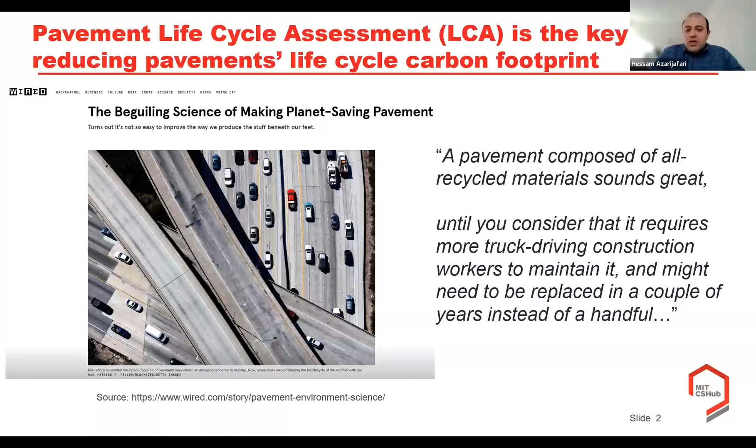But there is more awareness these days that we have to think about the future and the consequences of our decisions when considering solutions to mitigate GHG emissions. For example, it was stated that it might require more truck driving and construction workers to maintain it, implying the importance of considering the frequency of maintenance for those roads in the future, and also repair or replacements over the life cycle of a product.

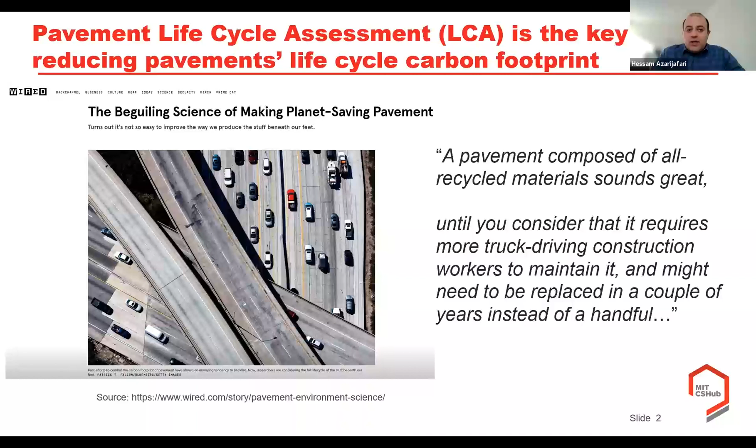We see the same approach when we look at legislation, for example the Inflation Reduction Act, where there are a lot of incentives around reducing the embodied impacts of construction materials, including different types of pavement materials. These are very well targeted to reduce materials impact.

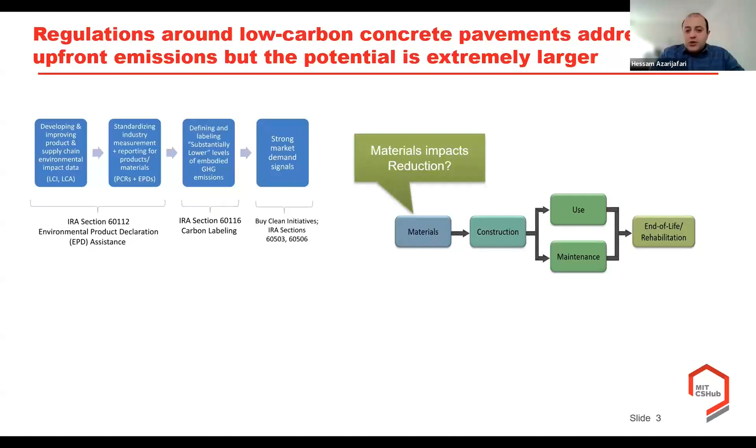But from a life cycle perspective, we see a lot of different opportunities in the construction, use, maintenance, and end-of-life phases of the pavement life cycle.

For example, how much we can reduce excess fuel consumption induced by the surface roughness and deflection of pavements. How can we improve the surface reflectance of pavements to gain benefits in terms of the albedo effect? Or for concrete pavements, how can we improve the carbon uptake or carbonation in order to sequester a larger amount of CO2 from the atmosphere?

From a maintenance perspective, it's a very important decision because it can determine the surface characteristics of our pavements. Think about how we can wisely spend our dollar values on pavements to get the most out of pavement performance and make the surface smoother or improve pavement condition. That's a very good question for improving maintenance activities and including this in our legislation.

Or ultimately, at the end of life, how can we improve the material circularity? How can we gain more benefits from recycling pavement materials into other products or other systems as well?

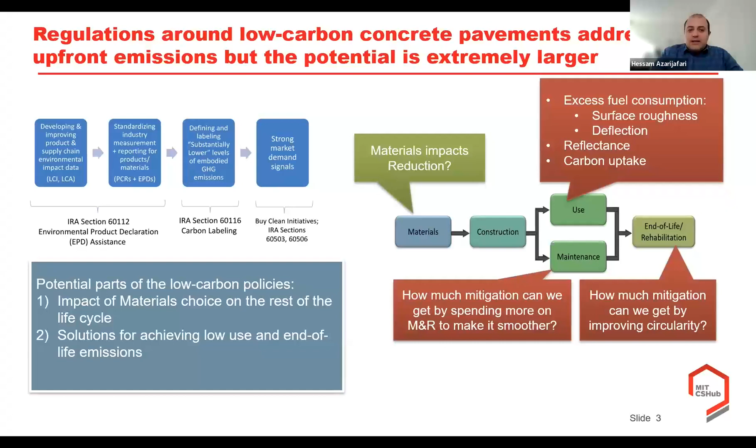So thinking about different solutions from a prospective standpoint, second, not only can we reduce the embodied impacts, but also think about current solutions available to mitigate use and end-of-life emissions. These are two important policies that we can add to embodied impact calculations, for example for buildings and embodied impact reduction. And why is it important?

These pie charts explain the importance of considering the life cycle perspective when we make a decision, showing the proportion of life cycle GHG emissions from different phases. As you can see, for both asphalt and concrete pavements, more than half or three quarters of the emissions come from the use phase emissions relevant to the surface roughness and deflection of pavements. And there is around a quarter from the material and construction, which we refer to as embodied impact.

So it's important to think about this more holistically and from a life cycle perspective. But what do we need to do?

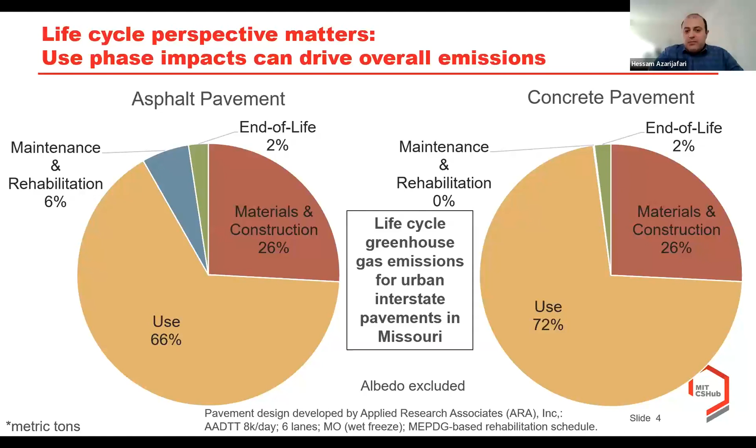Here, we would need some tools to quantify the environmental impacts of pavements. There are many tools available from different authorities, universities, and research centers that include and incorporate different life cycle phases and quantify the life cycle environmental impacts of pavements. We generally observe two shortcomings in these tools.

The first one, which was very prevalent, was that in many tools the use phase impact was completely or partially excluded, meaning that the pavement-vehicle interactions, the deflection and surface roughness induced fuel consumptions, were excluded.

The albedo effect or the carbonation weren't included as well. And in those tools that we have the use phase, we saw that they are relatively data intensive, meaning that they ask users a lot of data to quantify the life cycle environmental impacts, which makes the LCA cost prohibitive, both from the labor and data collection perspective.

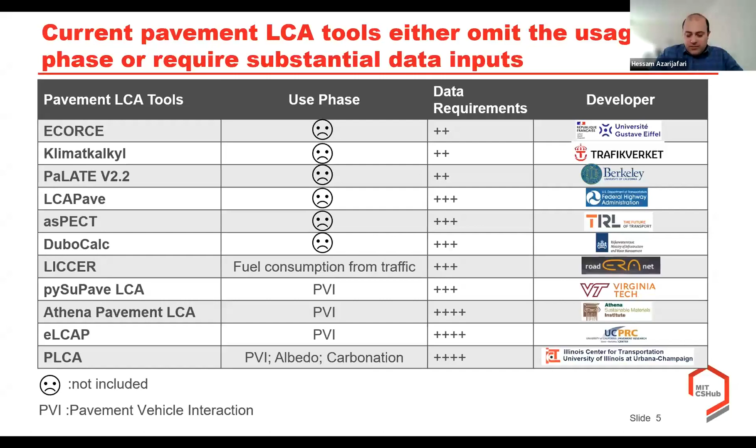So to put it in a nutshell, we observed that there are three main gaps in pavement LCA that we covered in our Streamlined LCA tool development. The first one is to deal with the cost and labor intensity of the pavement LCA. The second is about the extent of data that we need to input. And the last one is the uncertainty relevant to the future.

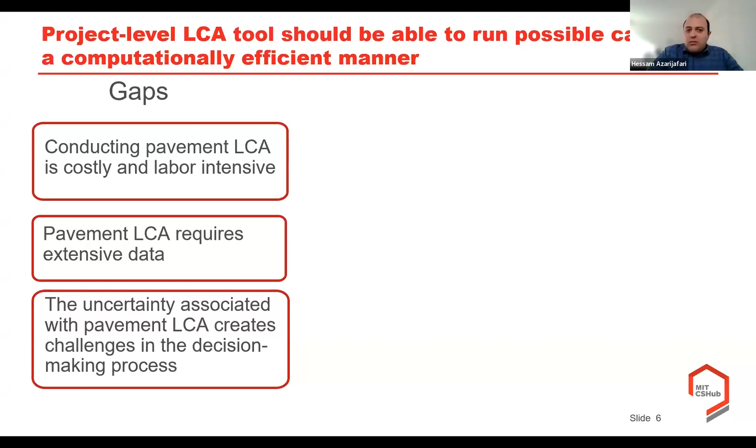Generally, whatever decisions that we make for the future deal with some level of uncertainty, and making decisions under uncertain conditions, capturing the uncertainty and embracing that would really help us to make a robust decision on the preferred scenario or preferred selections between different alternatives.

Here at the MIT Concrete Sustainability Hub, we developed a streamlined pavement LCA framework based on publicly available data. These are some federal and DOT available data that we collected and included in our tool and analysis. We included a probabilistic comparative analysis to capture the uncertainty and give the decision maker a better confidence about the robustness of the results.

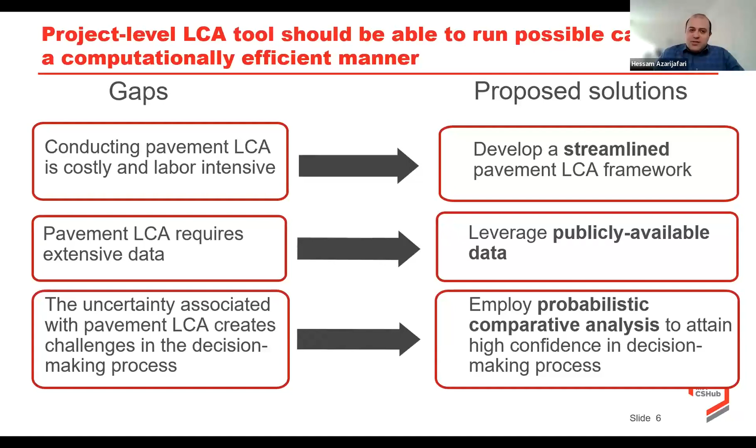Thank you, Dr. Azarijafari. So thanks for the brief introduction of the research gaps of the Streamlined pavement LCA development. I'm going to start with the methodology we have been implementing for the development of the CSHub Streamlined pavement LCA framework, and following that, the tool development based on this framework.

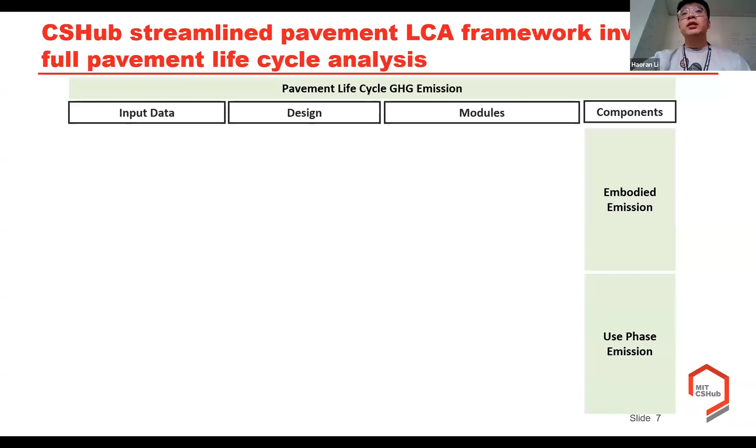So the CSHub pavement LCA framework involves all the components of pavement LCA. We have the embodied emission as well as the use phase emission consideration. To simulate the life cycle GHG emissions based on that, we need quantitative evaluation and computation of the material and construction emissions, which includes the raw material supply, transportation, energy, and fuel consumption.

And for the use phase emission, we have embedded three sub-modules: the pavement vehicle interaction, which is PVI, related to the deflection of the pavement, as well as the pavement surface roughness. In addition, we have embedded the model of the albedo, which is the reflectivity of the surface of pavement, as well as the concrete carbonation, which is also called CO2 sequestration.

And for the data requirement to do this modeling and computation, from the design perspective, we need a paving material mixture design for both concrete material and asphalt material, which are mostly used for our pavement construction, and here we have the pavement design alternatives: the JPCP and HMA design.

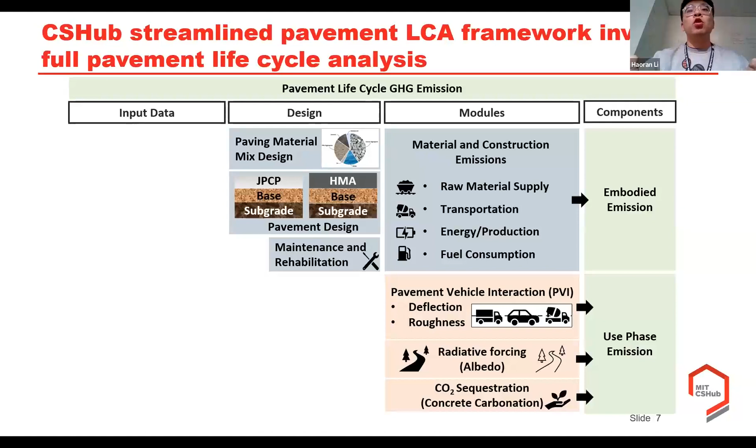In addition, the maintenance and rehabilitation, which is called M&R, is a significant component that will affect both the embodied emission because of the construction and material consumption, as well as significantly affect the sub-modules when we are doing the use phase computation of the life cycle GHG emission.

So there's extensive data required to maintain this computation and pavement design. We include different pavement context perspectives, which include geographical location and climate conditions of pavement, including temperature, rain, moisture, etc., as well as material properties for all the materials involved in our pavement LCA analysis. In addition, the pavement geometry, which is highly correlated to our pavement design perspective, and last but not least, the traffic loadings as a significant component affecting our use phase and also the embodied emission because of pavement design.

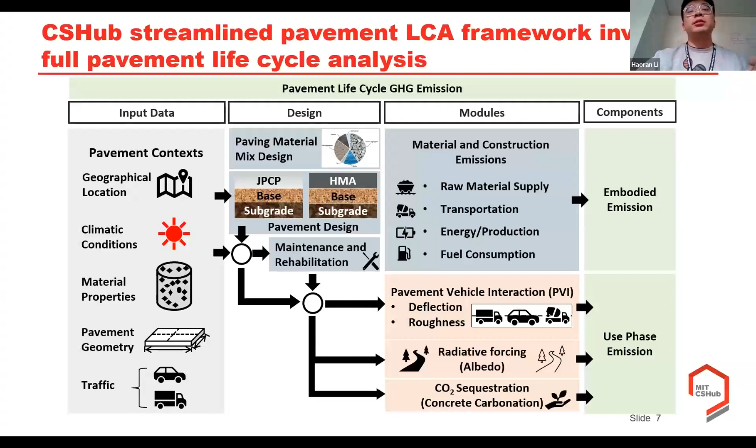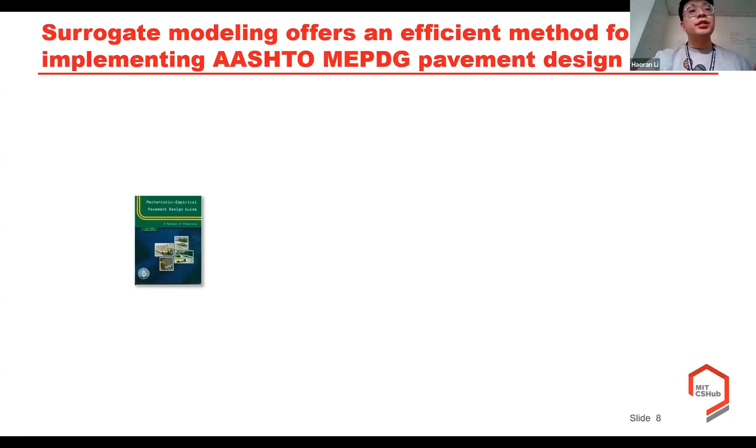And so we start with the pavement design streamline. Here we have the most advanced pavement design guide, very used in the US and Canada, which is called Mechanistic Empirical Pavement Design Guide, simplified as MEPDG. This design guide has many benefits, but also some disadvantages for the user to directly implement, because first it needs the Pavement ME software as a companion software, and the Pavement ME software requires extensive data from the user as well.

There's more than 2,000 inputs from the user to actually perform a segment level pavement design, which is complicated. In addition, the Pavement ME software is more like a pavement analysis software. It analyzes the pavement performance over a long time perspective, but it cannot give a direct design optimization for this pavement. Also, to run Pavement ME, there's a license fee which may not be affordable by local users. In addition, this is time-consuming software which needs several iterative designs to find the optimized design by the user itself.

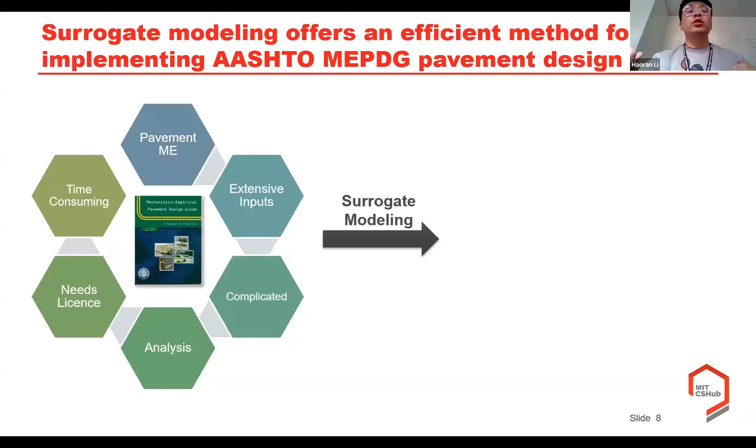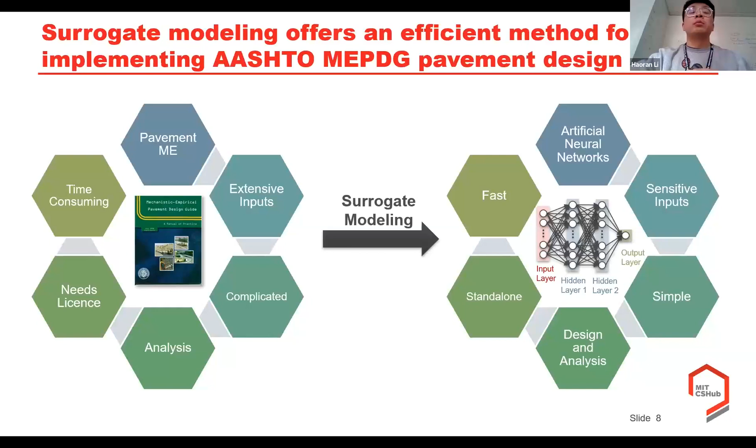So to solve this, we propose a surrogate modeling method to accelerate this pavement design using MEPDG. We propose to use a machine learning model as a surrogate model of Pavement ME simulations, using artificial neural networks to perform this surrogate modeling. We perform sensitivity analysis to extract the most sensitive design parameters for our neural network model training, which is simple and can involve both long-term pavement performance prediction as well as design optimization. This is a standalone model which can be run without further Pavement ME implementation, and this neural network surrogate model is much faster than the Pavement ME software.

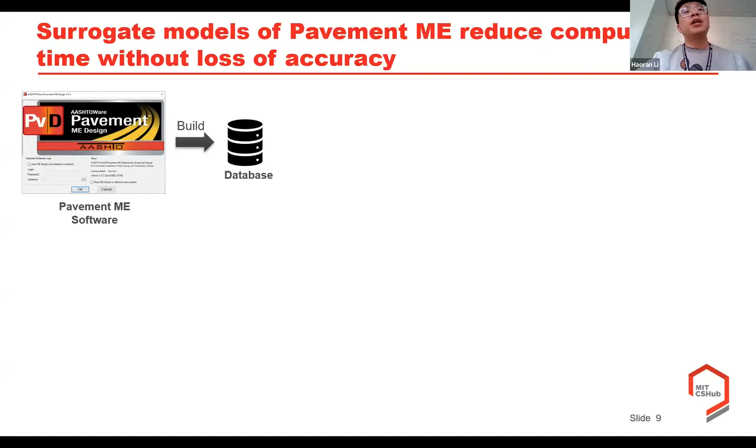So to do so, we start from the Pavement ME software simulation. We have run thousands of Pavement ME simulations to build our database for the training of our neural network models. After that, we embedded these neural network models in our Streamlined Pavement LCA tool as a standalone software tool, where we will be able to input our data directly into our Pavement Streamlined LCA tool.

Then we will be able to predict the different pavement performance for both concrete pavement as well as asphalt pavement, which include transverse cracking and joint faulting for the concrete pavement. For the asphalt pavement, we have fatigue cracking, rutting, and thermal cracking, which align with Pavement ME direct output. In this case, the pavement surface roughness can be computed based on the MEPDG guidelines as a synthetic indicator of pavement surface roughness, and they will significantly affect our design decisions.

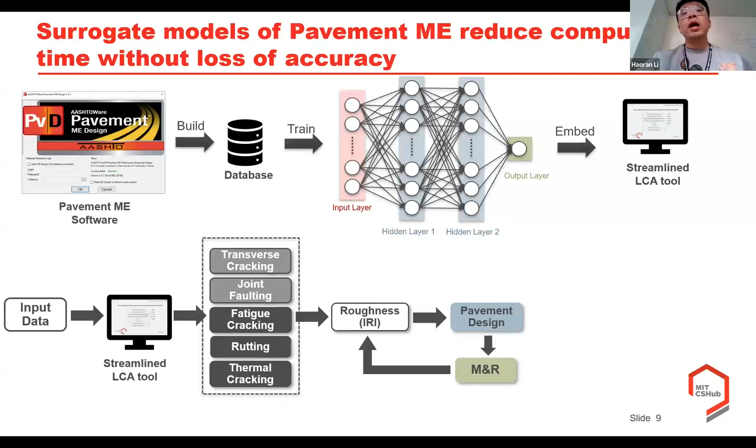In addition, the M&R will also be involved in our Streamlined Pavement LCA tool, which will happen during the pavement's service life, which will also affect the pavement roughness.

At last, we can compare our Pavement LCA IRI prediction with the Pavement ME prediction when we are using neural networks for the prediction of long-term pavement roughness. We can see here the neural networks have a perfect agreement with the Pavement ME prediction for long-term 50-year pavement service life, but the neural network model only needs a fraction of the computation time compared to Pavement ME.

To run a segment performance prediction, the neural network model only needs 0.02 seconds, which is much shorter than the 10 minutes Pavement ME simulation takes.

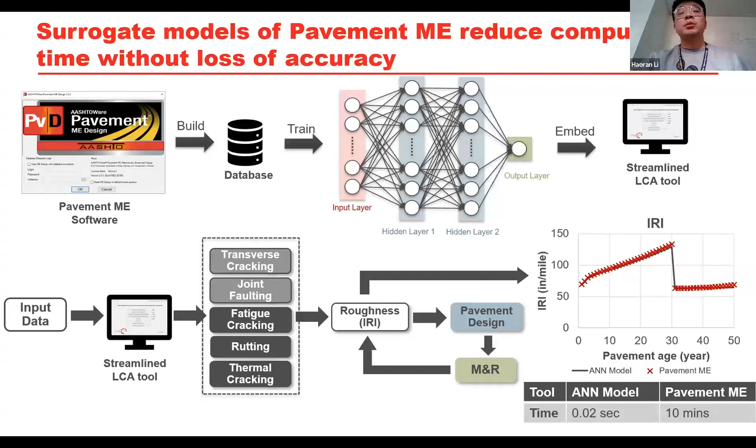So here we introduce a beta version of our Streamlined Pavement LCA tool. It's now under development with version 1.3. Here's the user interface overall. There are 3 steps to run the pavement LCA analysis.

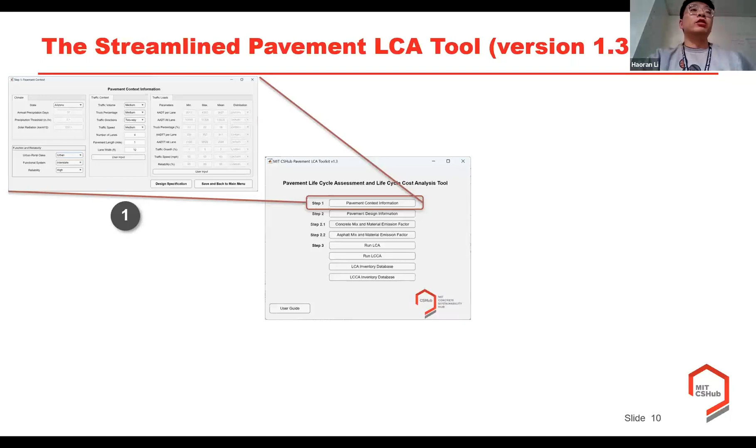First, we'll let the user input their pavement context information as we introduced in our framework, which includes the location of their pavement and the climate data as well. In addition, the traffic data, for example the traffic system, the functional system, reliability of this pavement design, as well as the detailed pavement truck load, the AADT, and the truck percentage, truck growth rate, as well as the truck speed, etc.

In the next step, we'll be able to use this input pavement context to design our pavement, the thickness design, the geometry design, so we have the capability now to enable the design using 2 design guides: the AASHTO 93 design guide, as well as the MEPDG design guide we just introduced. In this case, we will be able to have all the design components directly as output of this tool for further analysis of the pavement LCA.

In addition, for step 2.1 and 2.2, the material emissions will be computed for both concrete and asphalt materials. The mixture level pavement GHG emission will be computed internally, and we will also enable the user to input their own paving material mixture for their own local or project specific computation of the material emission as an overall indicator.

Next, we will then let the user input their scheduling of pavement maintenance and rehabilitations.

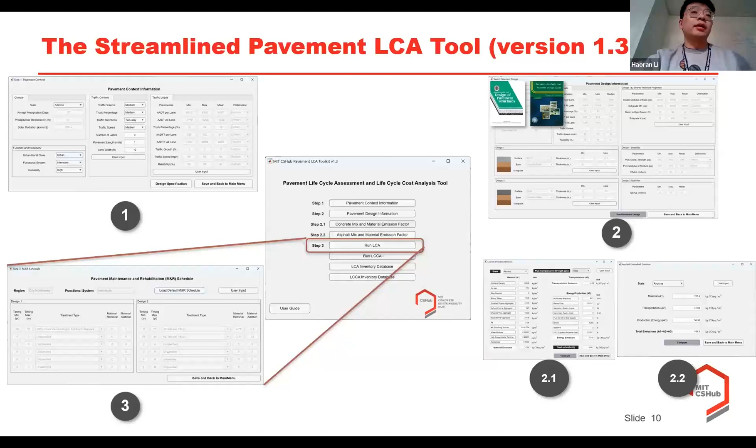So we have the default values, and also the user will be able to input their preferred M&R scheduling during the life cycle. So last, we will see the results when we are running the pavement LCA.

We enable the user to run a Monte Carlo simulation from 100 to thousands or more for a probabilistic analysis of this pavement LCA, because we know there are a lot of uncertainties within that analysis, for example, a 50-year long-time life cycle analysis.

Here we have this output as an example. The left panel shows the median inputs, which are observed from our input as a whole. We also have design 1 and design 2 as examples, which are median designs for different pavement design alternatives. Here we have a JPCP design and an HMA design.

In the middle panel as output, which is our median instance outputs, we have output for different visualizations. We have the stacked bar chart to show users all the components contributing to the life cycle GHG emission, including the use phase as well as embodied emissions. We also have the individual output for these two designs.

Last, on the right-hand side, there's pavement conditions. We have a life cycle analysis prediction of this IRI performance, and can compare them simultaneously. In the last row, there is a probabilistic and comparative pavement LCA analysis for both pavement design alternatives.

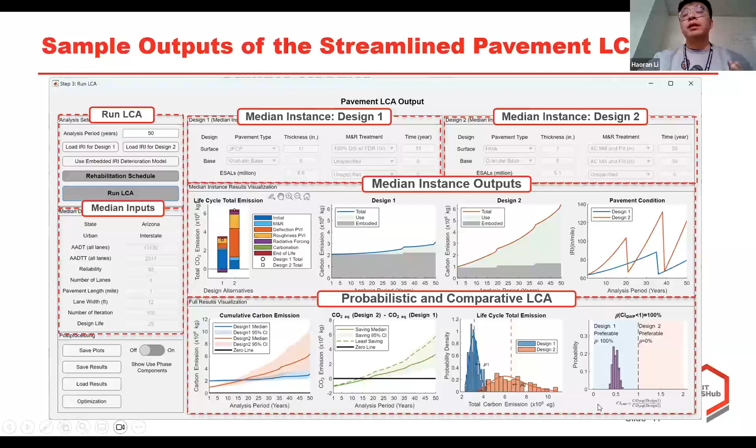You can see there's a lot of uncertainties and variations in the pavement LCA analysis. But we will also be able to show the users the probability at the end of this figure, the probability that which design may be preferable from a life cycle perspective.

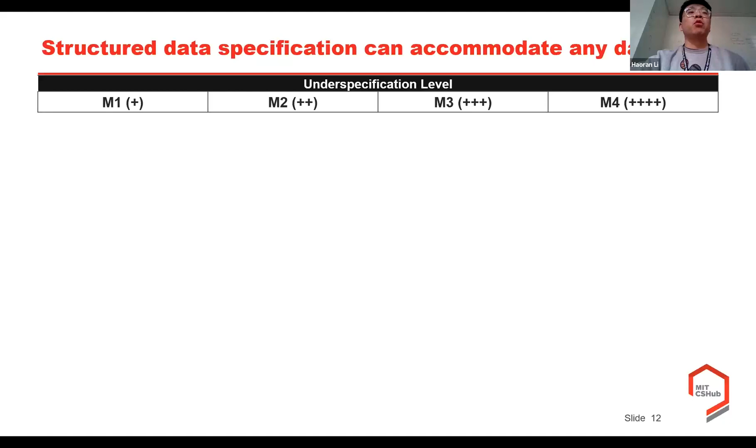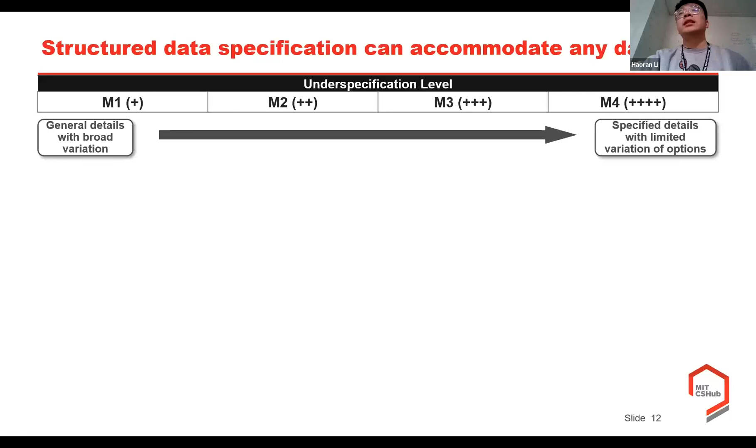As shown in this example figure, we have subgrade resilient modulus as our input. When we have no information of the subgrade we want to build our pavement on, we can assume it could be any soil type, so the variation of the subgrade modulus has very large variations, which could be from 5 KSI to 50 KSI. However, when we know more information of the soil we want to build our pavement on, for example if it's a silt-clay material, the relative uncertainty will be reduced and the variation also will be reduced.

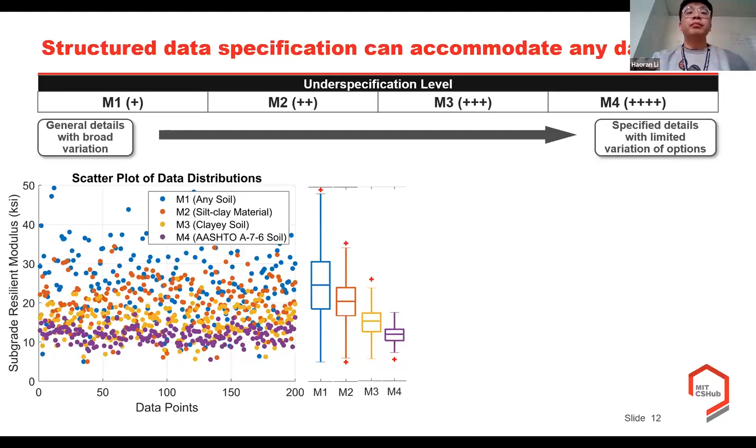And if we have more specific detailed information, for example M3, we know it's a clayey soil, and even M4, we know exactly it is a soil type defined as AASHTO A-7-6 soil. We now know there are smaller variations of this because of the subgrade material properties of this typical soil, so we will be able to shrink the variation from M1 to M4.

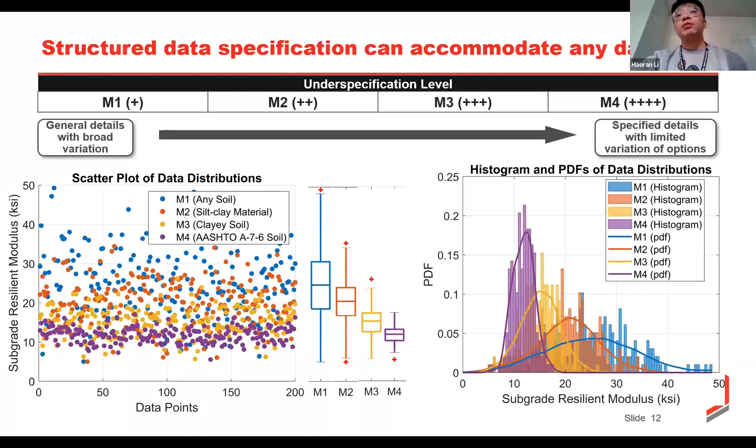Lastly, you can see this right-hand figure shows the distribution. So when we are shifting from M1 to M4, the relative variation will be significantly reduced.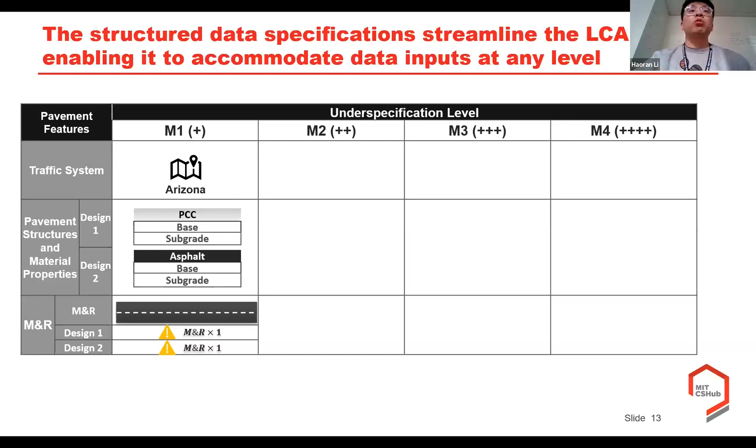We can also be able to run this pavement LCA. But with the increase of pavement details to M2 level, the user may know that there's a specific urban traffic system with standard grade concrete material, granular base, and granular material as subgrade, and for HMA, we have a granular base and the same subgrade. We know we may do a minor repair around year 28 to 40.

With the increase to level 3, we know more details of the traffic and material properties for both types of pavement design alternatives, and we also know more details of the specific M&R type and treatment we want to do.

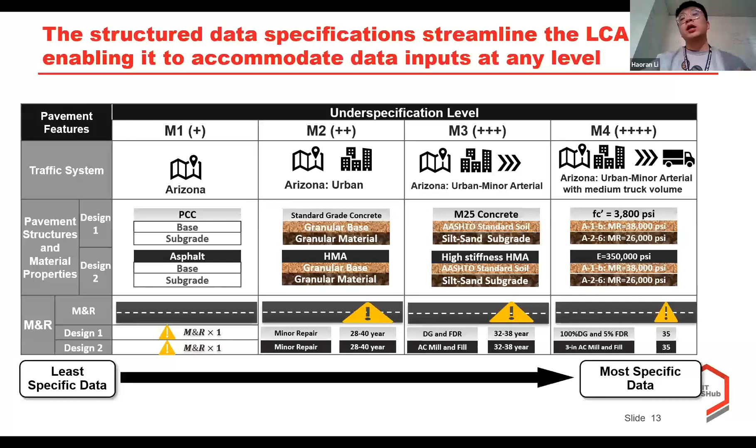And with the year range will be shrunk to 32 to 38 years. Furthermore, we may know all the details from the users at the project level, so we can accommodate all these specific data with specific detail numbers of each pavement design or pavement LCA components. So from left to right, the least specific data will move until the most specific data. This pavement LCA framework can accommodate any of them.

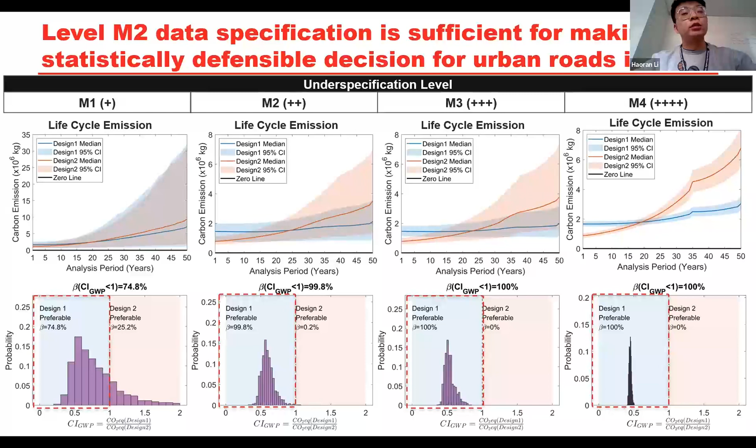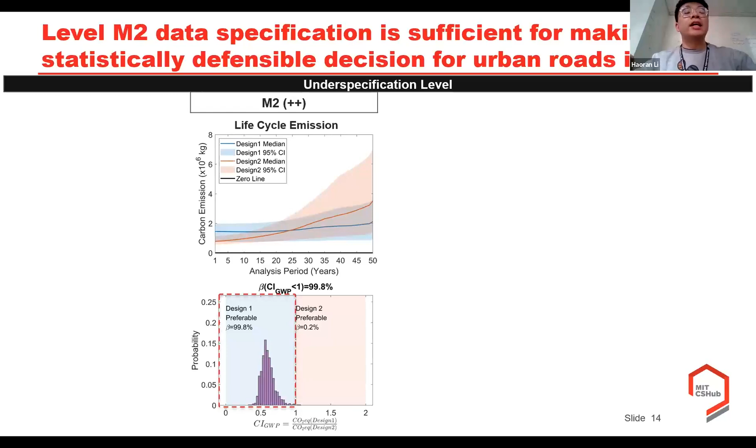However, if the user does not have the M3, M4 level of data, or it is time consuming for the users to get the data from the data source, the M2 level design is sufficient for the user to input limited data information, but can have high confidence when comparing two design alternatives in this case study.

So another case study we want to show is the capability of this Streamline pavement LCA tool, which we will be able to use with this pavement LCA framework to improve our design as well as the scheduling of the M&R.

So for example, here we have another example. It is a proposed pavement design at Massachusetts State, which is a rural interstate system. The two-way AADT will be 38,000 with a 20% truck percentage. The segment length now is 1 mile.

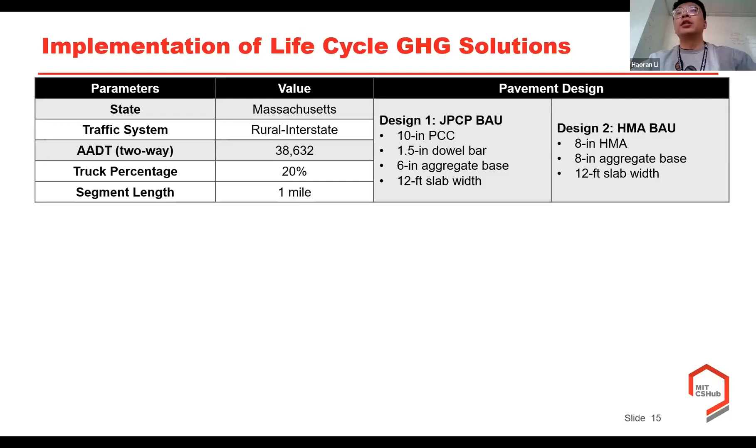So we also have two design alternatives, which are structurally equivalent. Design one is the JPCP, business as usual: it is a 10-inch PCC, 1.5-inch dowel bar, 6-inch aggregate base, and 12 feet slab width. For design two, we have an 8-inch HMA surface layer, 8-inch aggregate base, and 12 feet slab width.

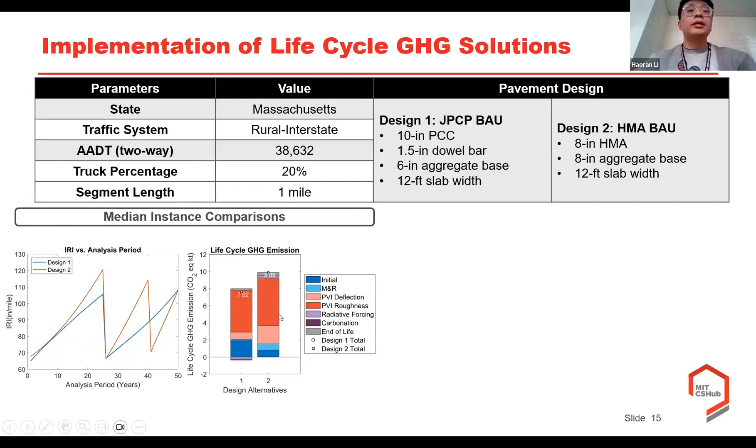So this is the median instance from the output of the Streamline pavement LCA tool. We can see that both pavements have been maintained very well from the roughness perspective. With JPCP, design one has 1 M&R about every 25 years, and the HMA has 2 M&R during the life cycle. When comparing the life cycle GHG emission, design one has 7.6 kiloton CO2, and design two has about 9.9 kiloton CO2 over the life cycle.

So we are comparing the probabilistic and comparative life cycle analysis results. We can see that there are also variations because of the uncertainties with this input data, and we are also able to compare which design is preferable. However, we can see there is a 22-year crossover, which means design one has to wait 22 years to see the benefit compared with design two alternatives. So in this case, we are searching for a potential solution to accelerate that crossover or beneficial time.

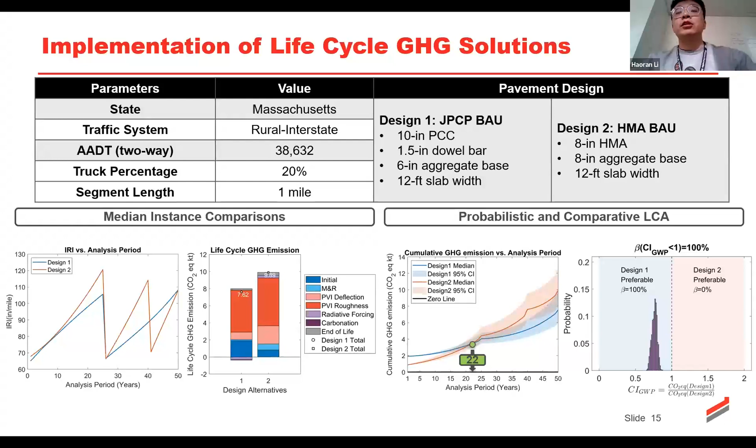So first, we try to improve the JPCP design, trying different pavement geometry design alternatives. As stated, our JPCP business-as-usual has a 15 feet joint spacing, 10-inch PCC thickness, 12 feet slab width, and 1.5-inch dowel bar. So first, we try to reduce the joint spacing from 15 to 12, with the other components remaining the same.

Third, we have reduced the PCC thickness from 10-inch to 9-inch. And last, we have tried to increase the slab width from 12 feet to 13 feet. So one parameter at a time.

When we are comparing the life cycle GHG emission, the HMA BAU and JPCP BAU will be serving as our baseline scenario. When we decrease the JPCP joint spacing, we can see that the life cycle GHG emission has been reduced because of the reduction of the PVI roughness, and also when we reduce the JPCP thickness, we also see a slight decrease of this life cycle GHG emission because of the slight decrease of embodied emission.

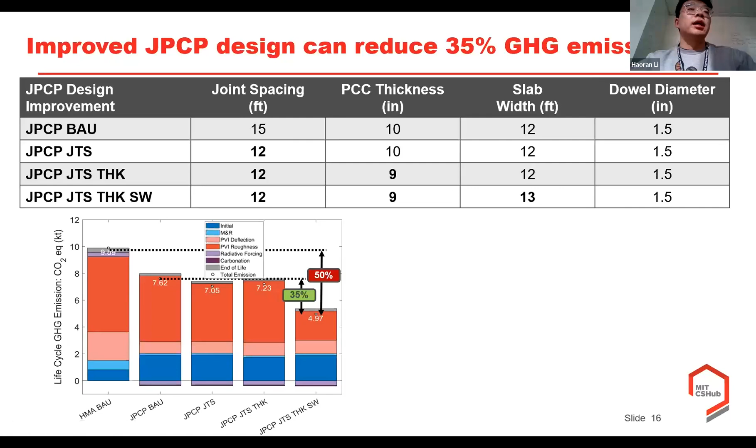The best strategy we have seen here is the last one, with the 3 parameters improvement. In this case, comparing to our JPCP BAU, the last case we tried has reduced 35% of the life cycle GHG emission because of this significant reduction of the PVI roughness generated GHG emission, even though there is a slight increase of the initial emission. And comparing to the HMA BAU, we saw a 50% life cycle GHG emission reduction.

So we are comparing the beneficial time, or crossover, with our baseline. We can see that originally it was 22 years, and now we can reduce the benefit time from 22 years to 14 years.

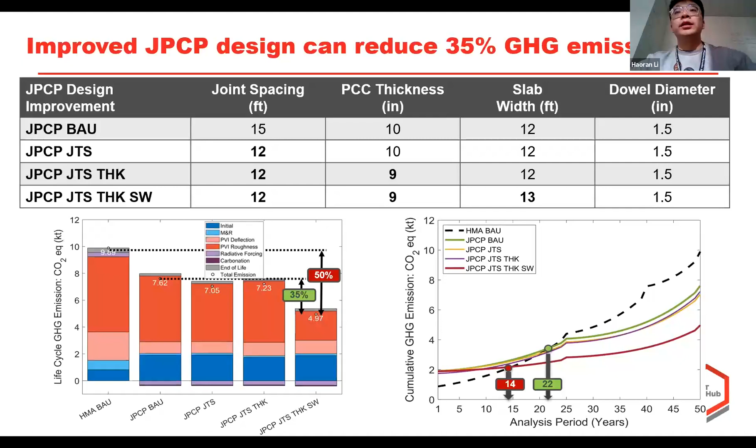We also tried to improve the M&R scheduling to improve our JPCP from a life cycle perspective. Our M&R BAU was 100% diamond grinding and 5% full depth replacement at year 25. So we tried 4 different scenarios to schedule our M&R.

We tried a 4-inch bonded concrete overlay at year 20, and we also tried a 6-inch bonded overlay at year 20 as well. We also tried diamond grinding alternatives: 2 diamond grindings, happening at year 20 and 40, and the last one, 3 diamond grindings, happening at years 15, 30, and 40 respectively. So from here, we can see the results.

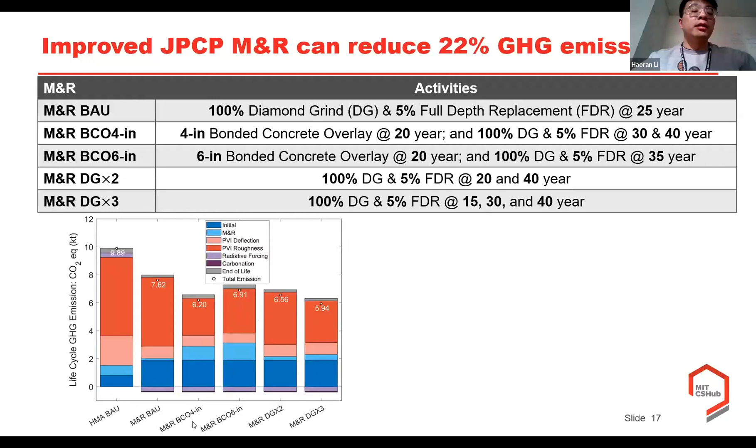From a life cycle perspective, we saw there are ups and downs for different M&Rs. There are several components; for example, the 4-inch and 6-inch bonded concrete overlay have much larger emissions from the M&R because of our overlay thickness, as well as reduced PVI roughness induced GHG emission. We also saw that when doing diamond grindings, we do not introduce too much emission from the M&R perspective, but we have reduced the PVI roughness emission compared to the M&R BAU.

Overall, comparing the best scenario we've seen so far, the improved M&R last alternative, which is 3 diamond grindings, can reduce 22% life cycle GHG emission compared to the M&R BAU. And comparing to our HMA BAU baseline, there's a 40% GHG emission reduction.

And when we are comparing the beneficial time, originally it was 22 years, and now the benefit time has been reduced to 18 years because of the improved M&R scheduling for the JPCP.

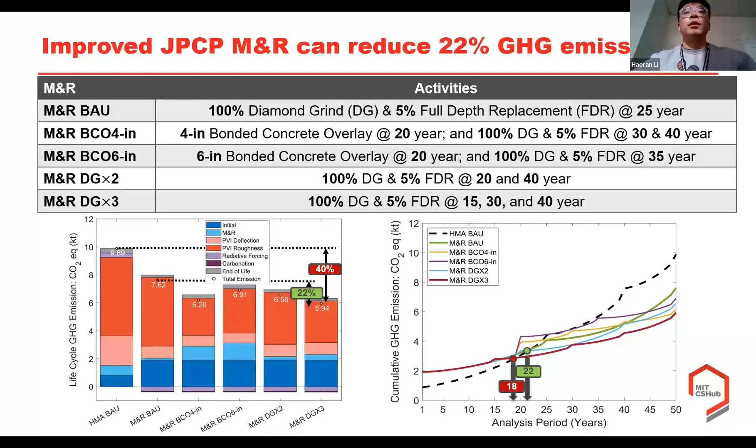We have also shown that the improved JPCP design can reduce the life cycle GHG emission by up to 35% when compared to the original JPCP design, and by up to 50% when comparing to HMA design alternatives. It can also shorten the payback time of JPCP from 22 to 14 years.

We have also shown that the improved JPCP M&R scheduling can reduce the life cycle GHG emission by up to 22% when comparing to the original M&R scheduling for the JPCP, and by up to 40% when comparing to the HMA design alternatives. This also shortens the payback time of JPCP from 22 to 18 years.

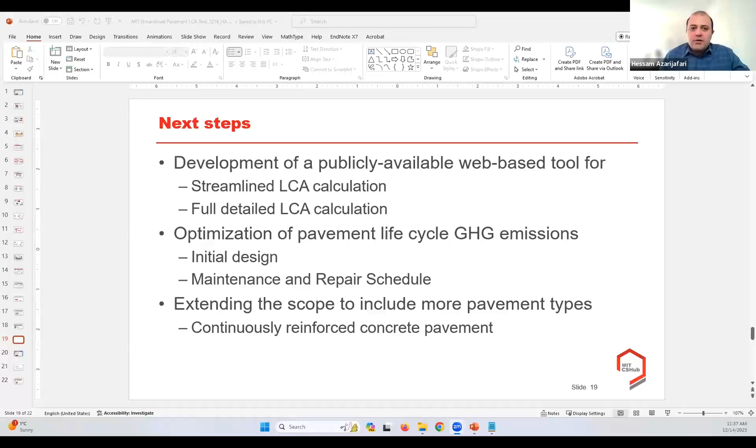I'm going to talk about the next steps to build off of the current capacity at the MIT Concrete Sustainability Hub around the Streamline Pavement LCA tools. As you see, the tool is now based on MATLAB code, and the graphical user interface is available. Please feel free to reach out to us, I'll share the email in the next slide, if you want to install the tool on your computer and work on the user interface we developed in MATLAB.

But we are working on developing a publicly available web-based platform for both the streamlined LCA calculation, meaning when you don't have all detailed data but still want confidence in your calculation, in addition to a full detailed LCA platform, meaning you have already collected all your data but would like to examine and calculate the environmental impacts of different scenarios in your system. This is the kind of flexibility we are building with professional web designers, to include the web-based tool and make it publicly available for everyone.